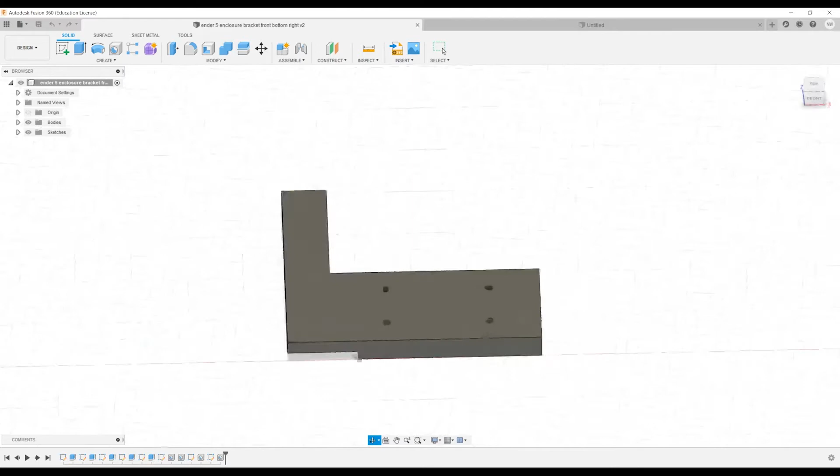So this is the completed model that I just made the other day, and again, based on our AutoCAD discussion and the design of this thing just now, this should make a little bit more sense. But basically, we've got this bracket where it's going to sit against the extrusion, and we're going to put 4 bolts in there. Now, if you're wondering about what's going on under here, the reason it's like this is if we go back to the Ender 5 and look, we've actually got some stuff going on here.

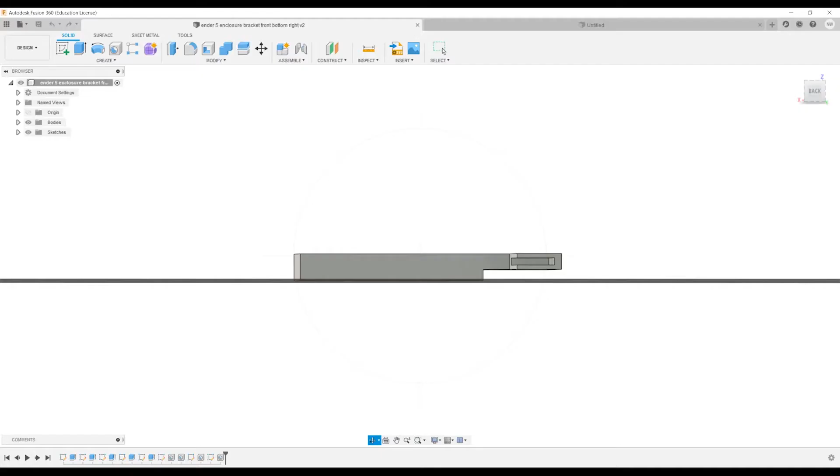So what I did was I measured it. It's between 3 and 5 millimeters. It was hard to get a good measurement of where this control panel stops from the extrusion. So I ended up going with a 5 millimeter gap down here so that this back piece is going to lay flat against the frame of the printer, and then this is going to go over anything that protrudes out from the bottom of the printer. So it's 5 millimeters, not very big at all.

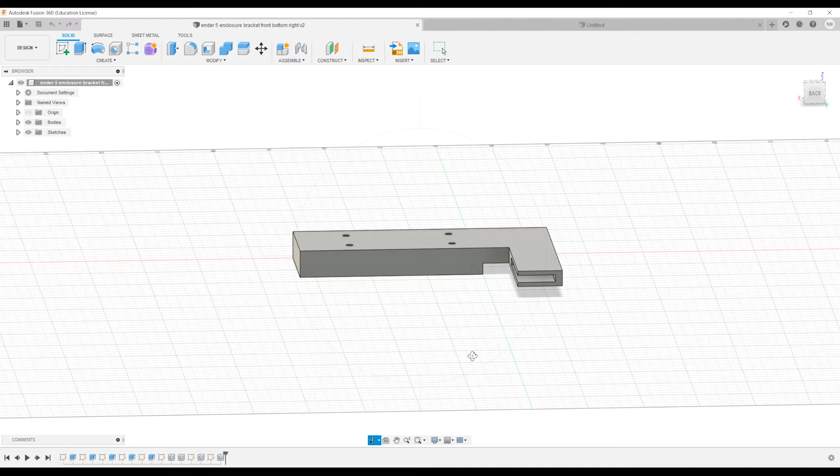And it is going to move the plexiglass sheet out 5 millimeters from the front of the printer, so it's not going to be 100% flush with the frame, but that's okay. The thing still needs airflow, so being able to pull air in around that small 5 millimeter gap is probably going to be good. So that is the piece.

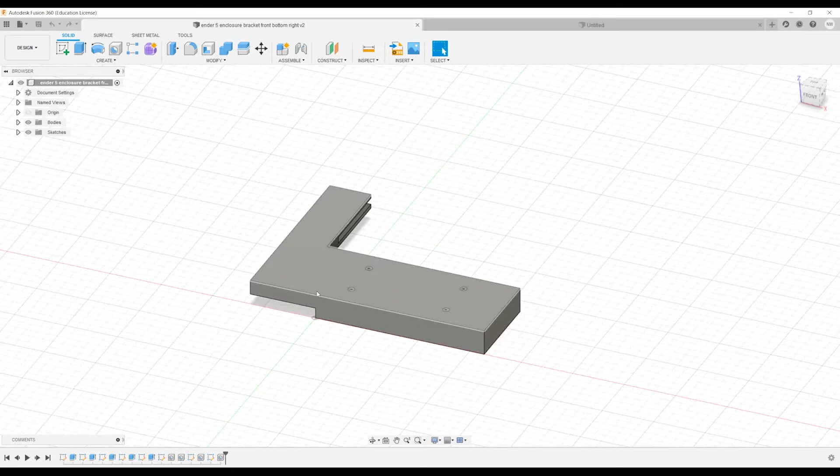We will go ahead and step by step recreate it over here in the blank Fusion 360 project that I've created. Now I'm going to pretty frequently make references back over to this for exact measurements, just because I had all this written down on a sheet of paper, and I made small changes to it as I went along and didn't record those changes on the paper. So I'm not going to be able to make this thing again right from scratch, but I'll make a couple of references over to here if I need to.

So the things that we know about our printer are based on measurements that I took, and if you're going to do the same thing, you should take your own measurements, even if you have the same printer. There's probably not going to be very many differences, but if there are, that would be not great.

So basically what we know about our printer is the frame, the extrusions, are 41 millimeters wide. I have just added them as 400 millimeters tall, which I'm not able to get a good 400 millimeters tall. But we don't really care about that a lot. We're going to be making 4 or 5 or 6 independent brackets that can slide up and down these rails any way that you want them to. So we don't really care about how tall this thing is. Really what we care about is the width, because the bracket's going to go the full width.

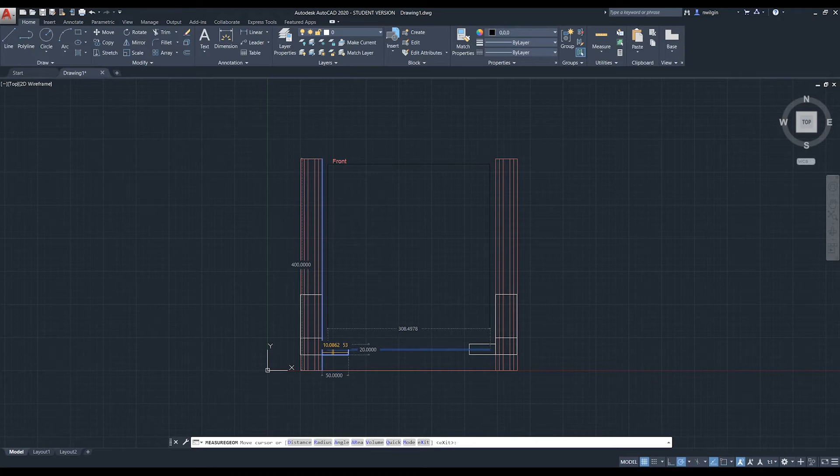We care about where the rails are, where our little bolt holes are in these rails that we can stick our T-nuts, and we care about how far out these flanges are going to come, what the little, what would you call that? Slit's maybe not the greatest word, but this little kind of drop-in area in here for the acrylic. So again, we don't really care about the height of these rails. We don't care really about a ton of the construction of the printer other than the width of the rail. So we're looking at 41 millimeters.

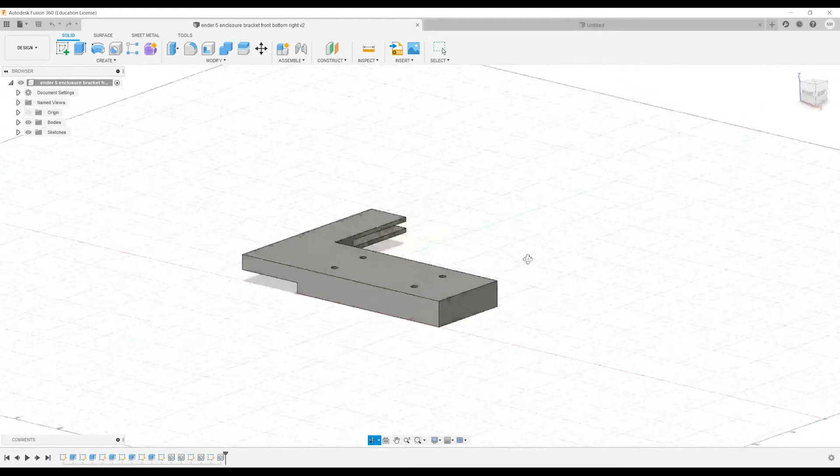So if we go back to Fusion 360, this guy, if we inspect, this guy right here should be 31.75 millimeters, which is 1.25 inches.

Oh, my headset just gave me a battery low notification, so we'll see how long this lasts.

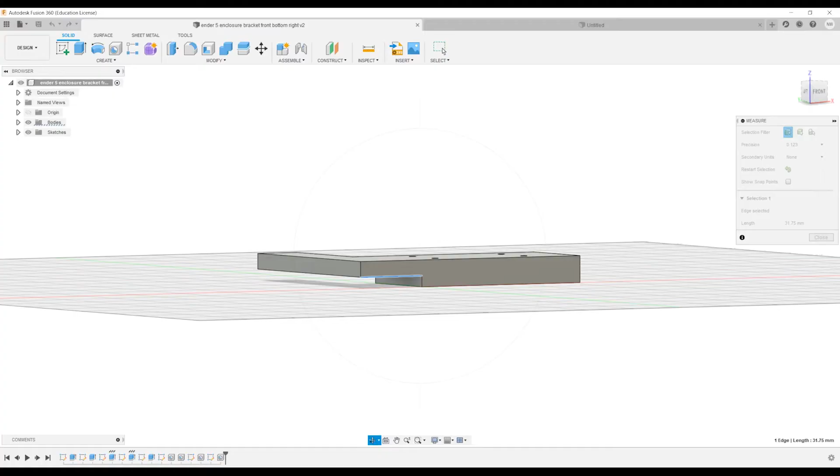But basically, this part where it kind of comes up, this is going to sit flat against the control panel of the printer right here at the top, and then it's going to drop down 1.25 inches with this, and it's going to come out. So those are our measurements. So we know it's 41 millimeters wide. We want to probably do, I think, 82 millimeters tall. Yeah, so I did 82 millimeters for our main bracket here.

So to start out with Fusion 360, and here comes the disclaimer. I'm a computer science engineer. I'm a programmer as a career. I am not a mechanical engineer. I am not a professional CAD user by any means. In college, I hung out with a lot of mechanical engineers. I did pick up a little bit of CAD experience, and obviously, if you have the software and enough time, anybody really is able to learn the ins and outs of a piece of software like this. So if you are watching this video and I say something that is not entirely accurate, or a process that I'm doing is not really airtight engineering-wise, leave a comment if you want. Please don't be hurtful, because I truly am confessing to you now I am not a professional with CAD.

The things that I make are designed really for my 3D printer. They're designed for, if I've got a buddy or a hookup with a CNC or anything like that, the things that I design are going to be designed to be used by me, and used by the things that I use to make these pieces. So they work. All of the things that I've ever made here have worked with my printer, the processes that I use and the things that I build. But again, if it's not airtight engineering, I apologize. We're always learning, and I hope to get better at this kind of stuff in the future as time goes on. So anyway, Fusion 360, we'll start out with a blank canvas here.

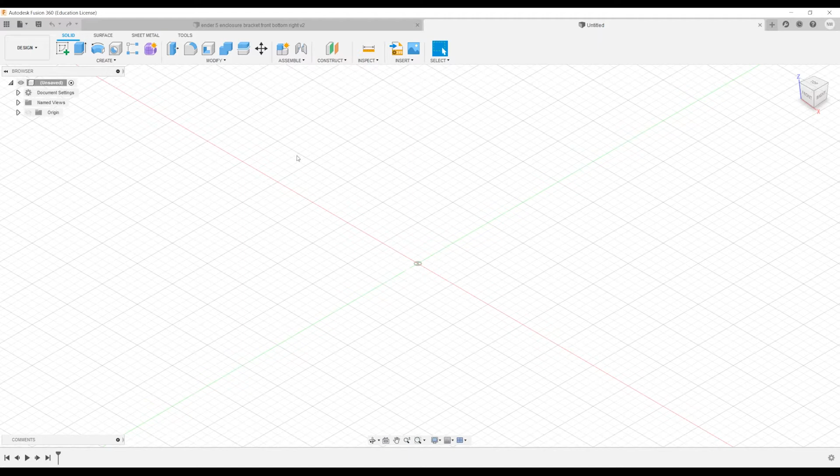And basically the way that I always do things is I sketch it out, and then I proceed to make it solid. So we'll start with a sketch, a two-dimensional sketch. Select really any plane. I usually just select the flat plane that's already there. And we said something along the lines of 82 millimeters long for our piece, and we know it's going to be 41 millimeters wide.

So we're just going to start our rectangle, and without holding down your mouse button at all, it's going to let you drag this. And you'll see these numbers here. There's a number on the left, there's a number on the bottom. Those are going to be your dimensions of the rectangle.

And here is where any kind of CAD software really is extremely helpful, because you could do 3D modeling of sorts in most programs, maybe even Photoshop if you wanted. But this is going to give you really exact measurements and ensure that everything is spot on. So in order to give the exact measurements that we want and not have to drag this to our exact numbers, you'll see how the one on the left is already highlighted. So that's going to give us an input to type in.

So we're just going to type 41 because our units are in millimeters. We know that the extrusion is 41 millimeters wide. So we're going to type 41. We're not going to hit enter. We're not going to hit escape. We're not going to do anything like that because we're not done. We're going to hit tab to tab over to our next input for the length of our sketch. And we said that was going to be 82 millimeters.

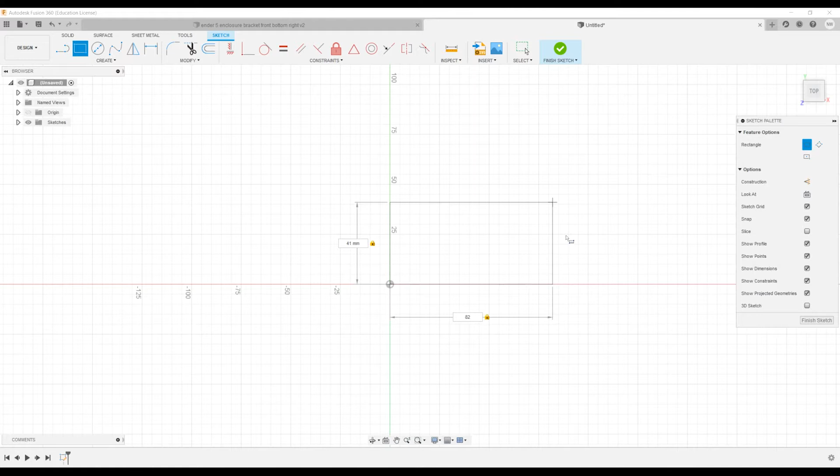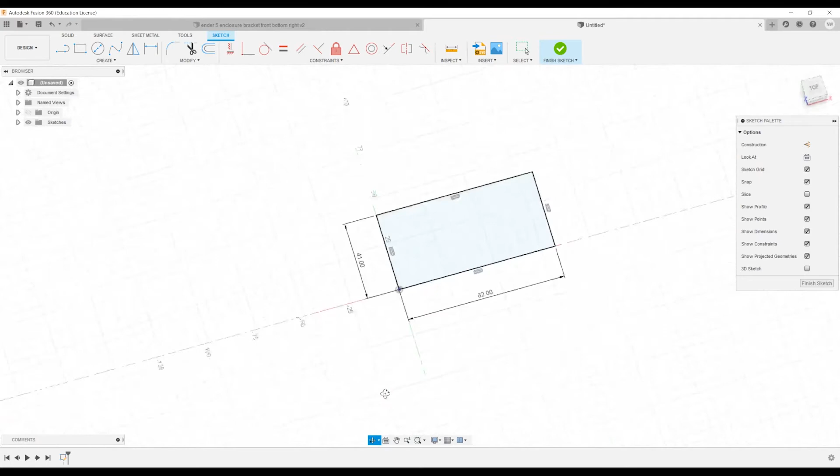So now that you've got 41 in width and 82 length, you're going to hit enter, and that's going to give you a 41 millimeter wide sketch with 82 millimeters long. So the next thing that we need to do is give this thing some depth, make it 3D. If we look at it right now, there's nothing really 3D about this. It's a 2D plane. So the best way to do this, at least in my experience, is to use the push-pull tool or extrude tool, like so.

Now, the question is, how thick do we want this bracket to be? I can't actually remember exactly what thickness I used for it, so we'll look here. We used 12 millimeters. Now, I actually do remember this now, I started out with 10 millimeters and was concerned about how thick some of these walls would be once you get down to this flange. So I decided to increase it from 10 millimeters to 12 millimeters.

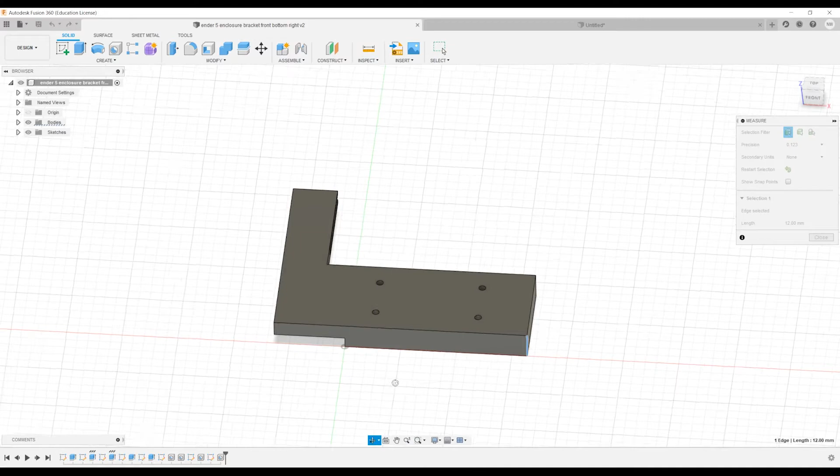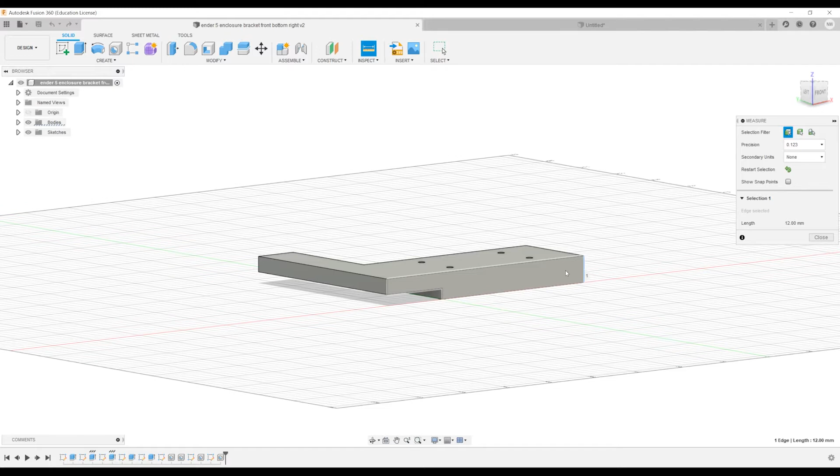And the reason is, remember how I said we need to drop this up for the control panel, 5 millimeters. Once we drop this, we're working with the thickness in millimeters minus 5 millimeters. So back when I had this piece as a 10 millimeter thick piece, we were losing 5 millimeters with the drop up, and that was making this total thickness 5 millimeters, which if we move around here and look, once you take away the 1/8 of an inch filling in here, these walls were going to be way too small. They were going to be just under 1 millimeter.

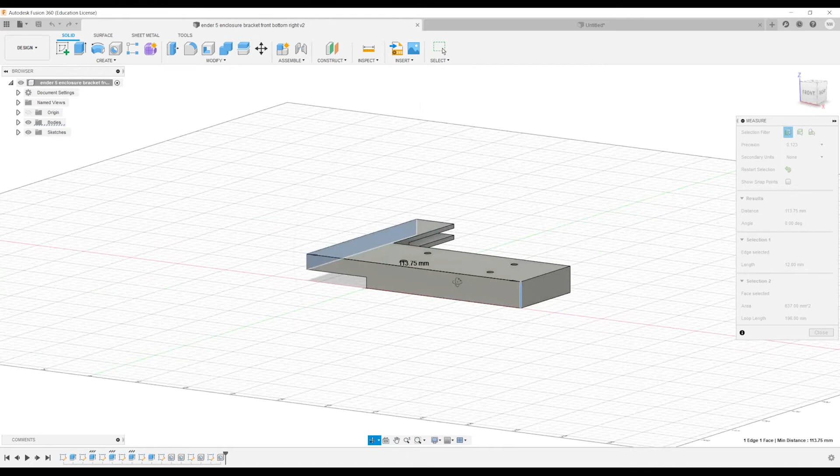And I thought that, one, I don't think the 3D printer's resolution is going to print that very well. And two, even if it did, I have a feeling that over time these things would probably crack. So I ended up adding 2 millimeters to the total thickness of this bracket. And that ended up bringing these walls to just under 2 millimeters instead of just under 1 millimeter. It's like 1.91, I think, and that should hold up a lot better. So that is the reason that we did that as 12.

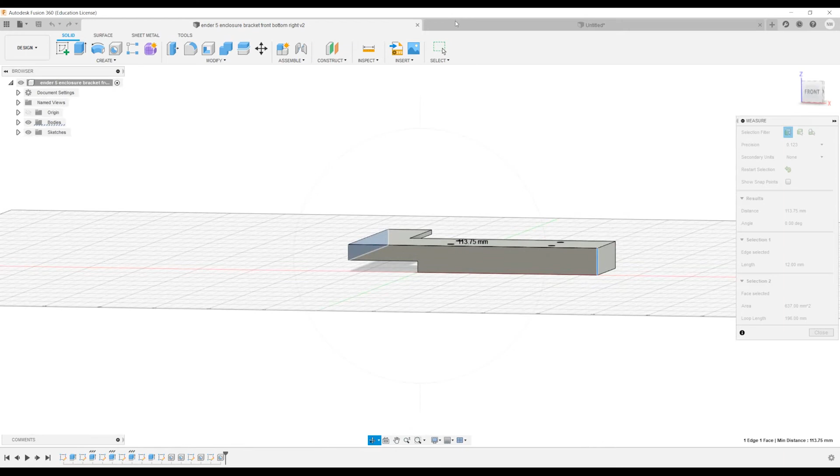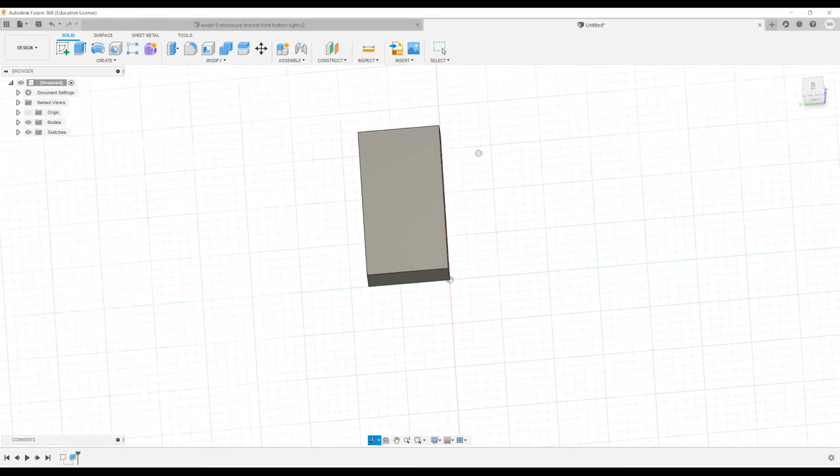So basically we're going to bounce back over to our new project, back over to the solid tab, hit extrude. Now we're going to pull this up 12 millimeters. We're just going to type in 12, hit enter, and bam, there we go. Now we've got a nice rectangular solid block. It's going to be 41 millimeters wide, 82 millimeters long, and 12 millimeters thick.

So now that we've got that, this block is going to essentially be this first white block on the top of our bracket. So this is going to be the piece where the bottom part meets the control panel. So we have a couple options here. We could continue making the rest of the bracket, or we could drill holes. I'm going to go ahead and continue making the rest of the bracket before we drill the holes.

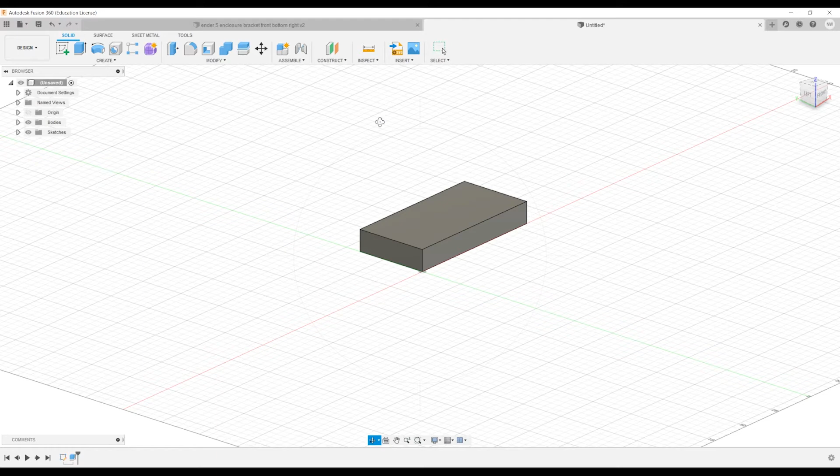So again, we're going to make the bracket for the right side of the printer. So we're just going to need to have our flange come off the left side of this bracket, so it's in the center of the printer. So the next thing we're going to do is we're going to create another sketch.

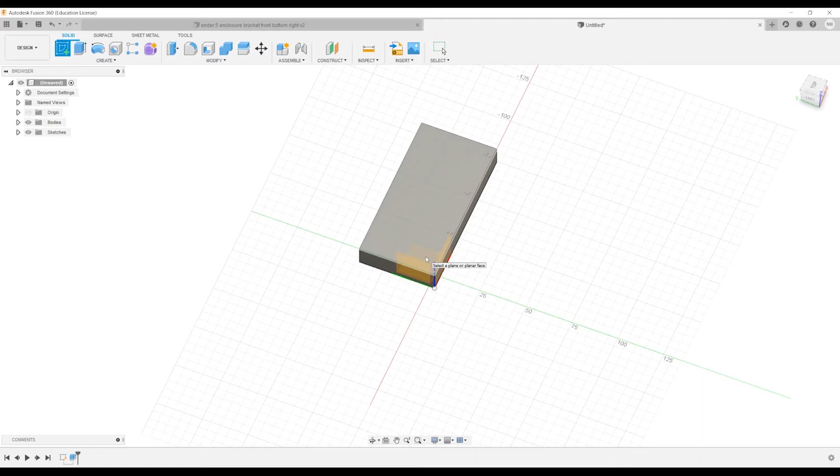Always create more sketches. Now, you know how I mentioned the lack of airtight engineering and lack of actual Fusion 360 training? This is probably where it's going to show itself. So I'm going to go ahead and select just the piece that we already are working on. We're going to draw another rectangle, of course. And what did I say? We're going to drop that down 1 1/4 inches, which is 31.75 millimeters.

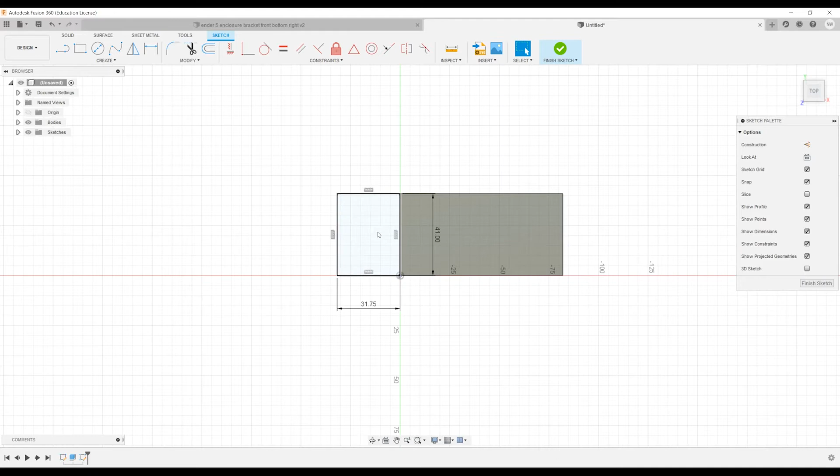So in order to do that, we're going to make it 41 millimeters wide like the existing piece, and we're going to make it 31.75 millimeters long. It's going to give us our drop down. Now we need to extrude this 7 millimeters. 12 minus 7 is 5. So we're going to grab this guy.

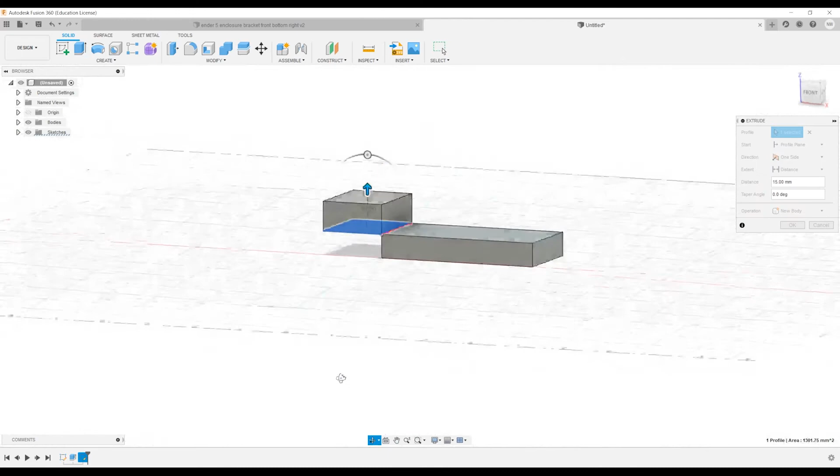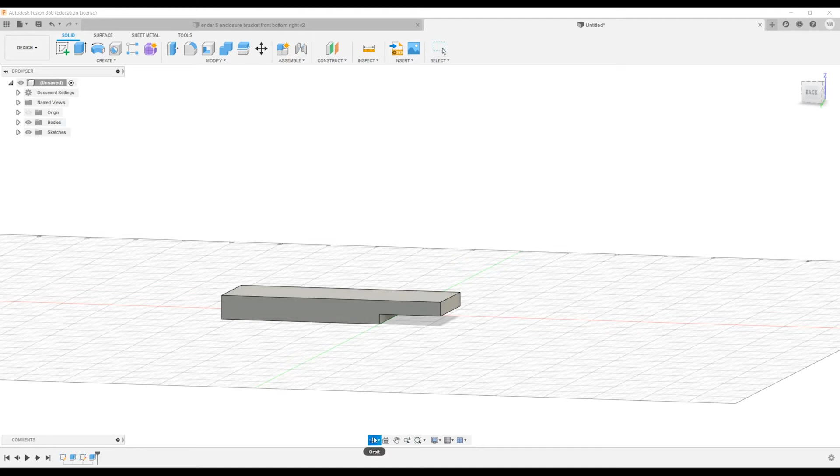Now, you'll notice that if I choose to extrude by a positive number of millimeters, we're actually not doing at all what we're supposed to be doing. The reason for that is because of the plane that I have selected to create the sketch on. So for this specific application, we need to go down by 7 millimeters. So we're going to type in -7, hit enter, and that's going to give us this offshoot from the main piece. So if we go up to inspect, click on this line here, it should say 5 millimeters. Perfect.

All right. Now we need to add the flange to the piece. So we've added our drop down here, or drop up here. Now we just need to add a flange that comes off this side. So we'll bump back over here just for reference and see what dimensions I used on this piece. 20 millimeters, and the inner portion here is 16.825. So we made this 20 millimeters. I can't remember exactly why, maybe it was just a nice round number. So basically we want a 20 millimeter flange that's going to jut off this drop up here.

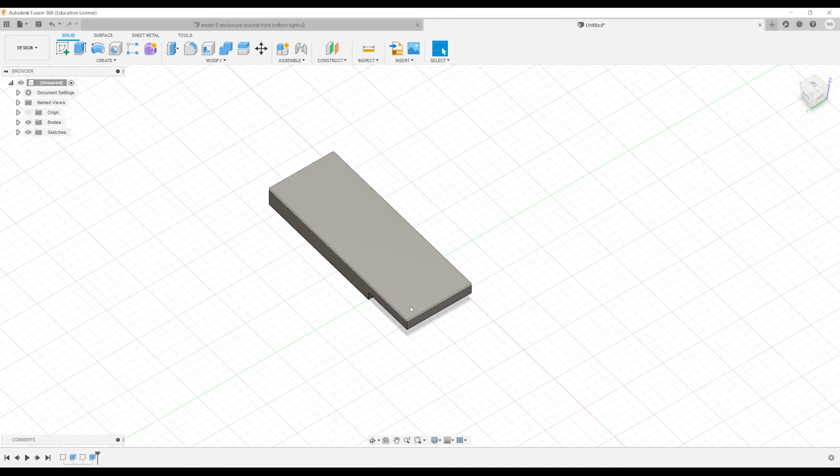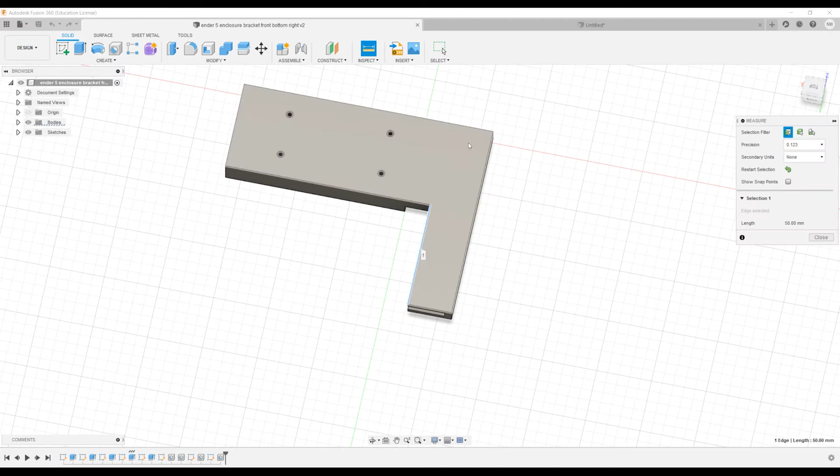So good old sketch tool once again, select the same plane. We're going to be coming off this side right here. So basically take your rectangle, start at the corner, and we made it 20 millimeters by, how many millimeters did we come out? 50. We came out 50 millimeters, so let's do that. 50 long by 20 wide.

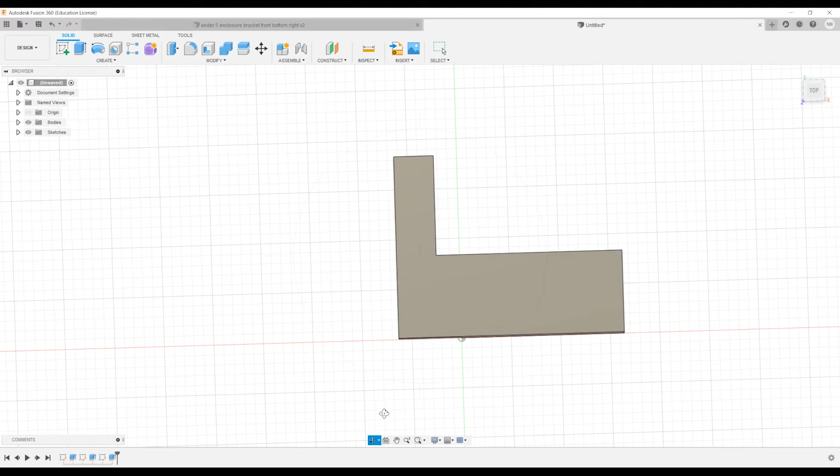There we go. Now, good old extrude, click that. Go ahead and type -7, hit enter, grab your rotate tool, and look at that. Wow, look at our bracket. Nice, nice, nice. All right, so let's go ahead and push this in so that we can get our piece of acrylic in there, and then we'll go ahead and drill the holes.

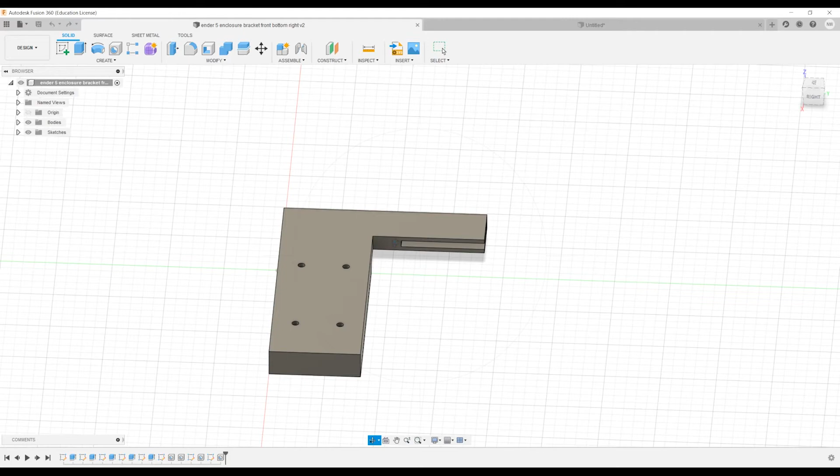So as you can see, the way that this is set up is so that the acrylic can slide in here. It's a ½ inch out from the extrusion. So this little wall right here is going to be a ½ inch. And then right in here, you see it's going to slip in, and then it's able to come all the way out. So this part's open right here.

So the acrylic we know is 1/8 inch thick. So if we take our inspect tool and look, what is that in millimeters? I already did this once. So 3.175 millimeters. Let me just double check that. 3.175. Yep, looks accurate to me. Let's triple check it. Yep, that is accurate. So 3.175 millimeters is going to be 1/8 inch. So that's the goal that we're going for here.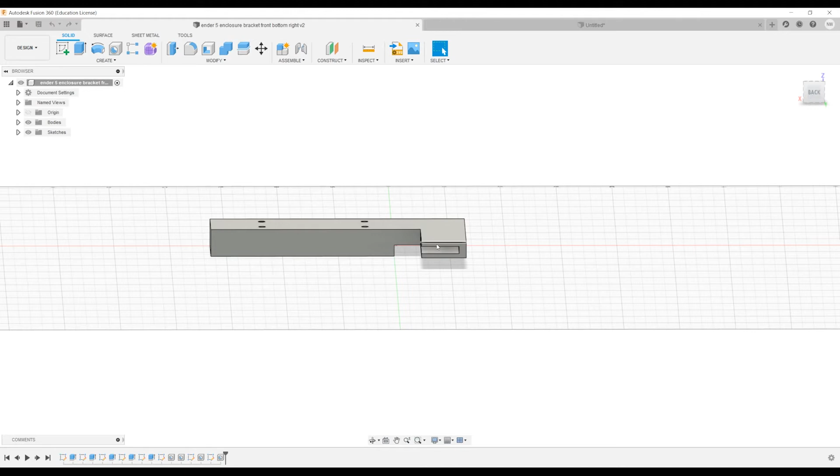And then I believe that our walls are going to be 1.913 millimeters. So getting this centered, one more measurement we've got to do is this guy right here. What is a ½ inch to millimeters? 12.7. So let's verify that this is 12.7. If we just do an inspect, 50 millimeters, 37.3 millimeters. Yep, that is going to be 12.7.

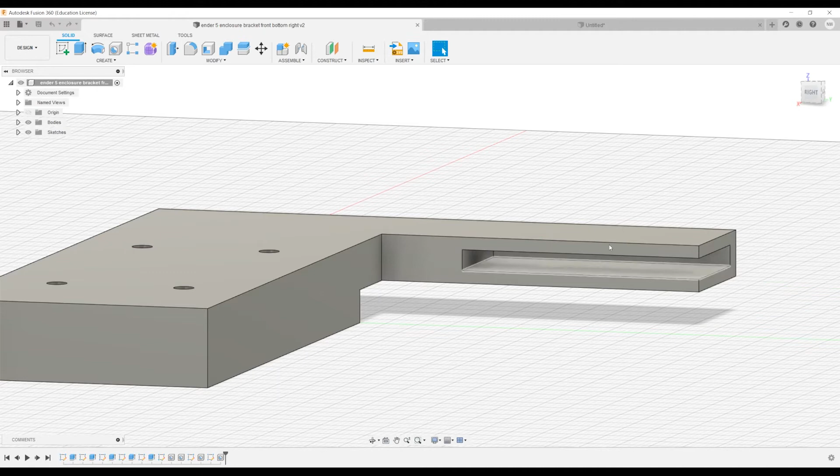Perfect. So in order to do that, sketches are my best friend. They might be your best friend, who really knows. I'm going to make a new sketch on this face here. I'm just going to take a line and do right out here 12.7 millimeters. All right. Oops. Yeah, another line.

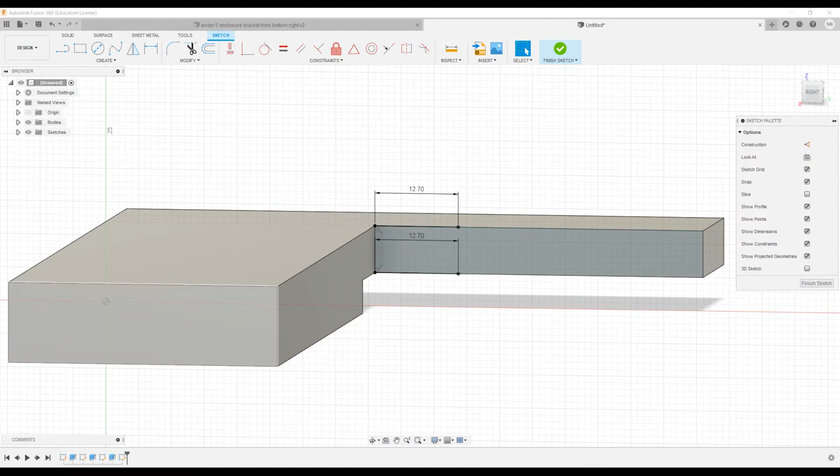12.7. Okay. Now we know that 1/8 inch was, what did I say that was? 3.175 millimeters. So if we know that 1/8 inch is 3.175 millimeters, we know that the thickness of this face is 7 millimeters. So if we take our calculator again, and we do 7 millimeters minus 3.175 millimeters, we're left with 3.825. And since we're putting this indent kind of deal in the center of the piece, we need to divide this by 2 to figure out what each wall height is going to be,

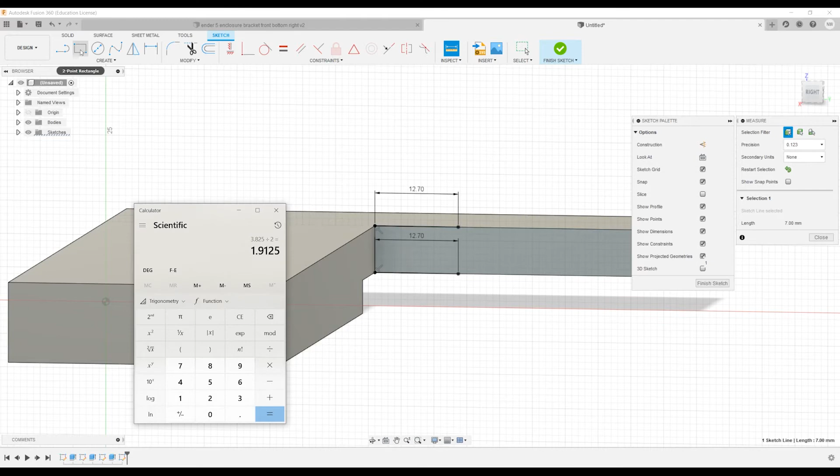and that's going to give us 1.9125. So in order to determine where the walls stop at, I'm going to take a line and do 1.9125, okay? And then another line from the bottom here, 1.9125, okay? So now we can basically just take our rectangle tool. We're going to start at either of these points that we just created with the line, okay? Drag up and then drag out.

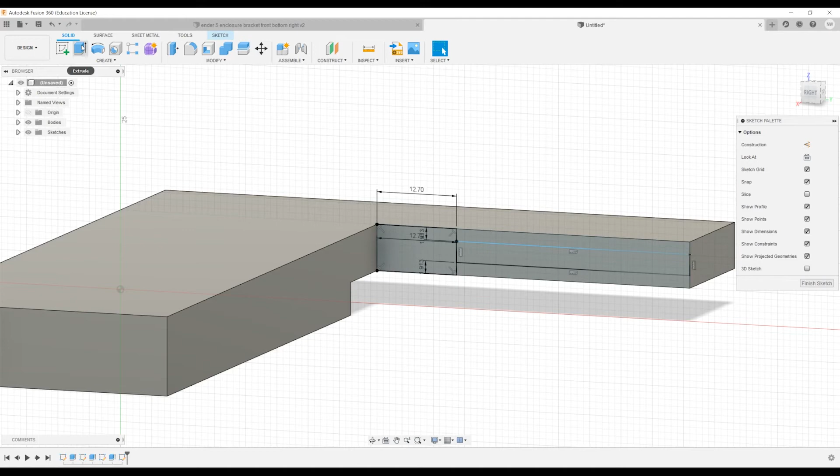And then you'll see that on the left, our one measurement on one side is 3.175 millimeters. Our measurement on the other side is 37.3. So we're going to go ahead and create the sketch. All right. Now we're going to come back to the extrude. We're going to click on this face, and then if we extrude it inward like so, you'll see that we're creating that indent. So we want to figure out how deep this needs to go, and then how much of a wall we kind of want on the bottom.

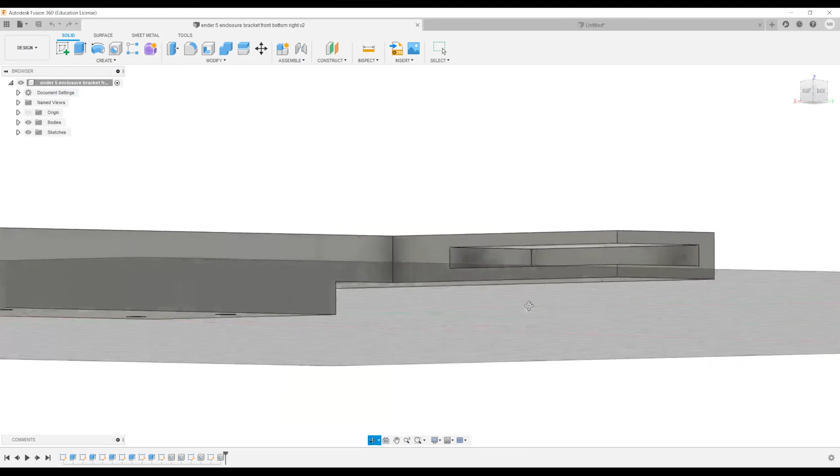So let's see what I had done over here. Like I said, a lot of these numbers were just kind of on a whim. So okay, inspect, 20 millimeters minus 16.825 gave us 3.175. Yep, okay, that makes sense. So we're putting 1/8 inch wall down here. So let's, oops, Control Z, I backed out of that.

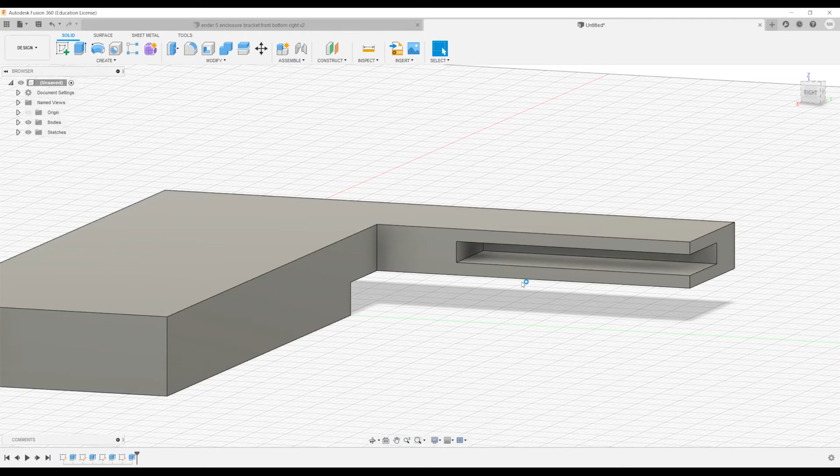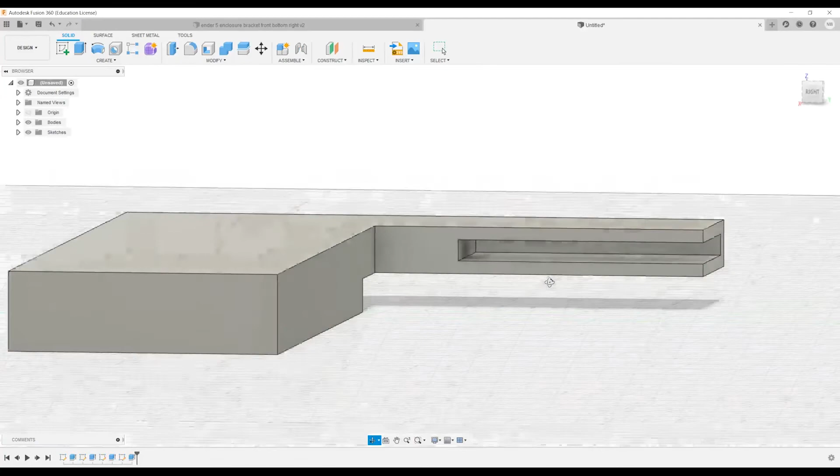All right, we're going to go ahead and extrude that. And we know, what did I say this was, 20 millimeters? So basically, we want to go in 16.825, right? So negative 16.825. Enter. All right, now we've got our little slot. That's a better word for it, slot. There we go. All right, so we've got our little slot for the acrylic sheet to slide into.

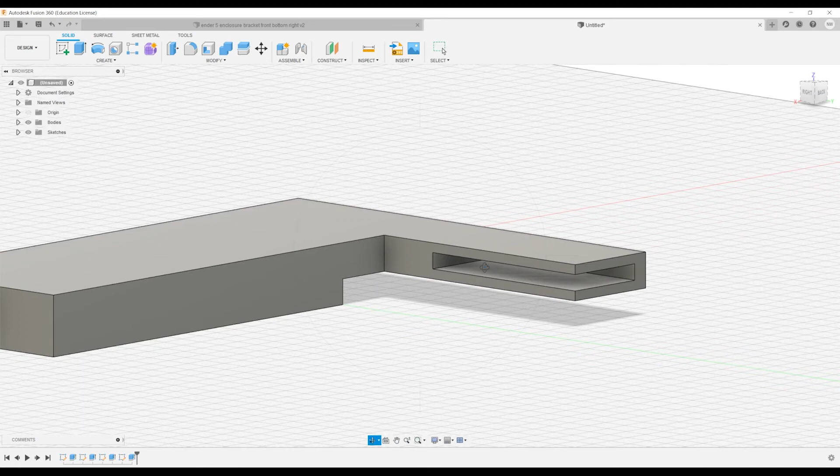So, basically, what you've probably gathered from me so far is that I really like making sketches. The sketches really help me kind of get things positioned just perfectly. There very well may have been a better way to position this slot in the center of this flange here, but that is the way that I did it with the sketches.

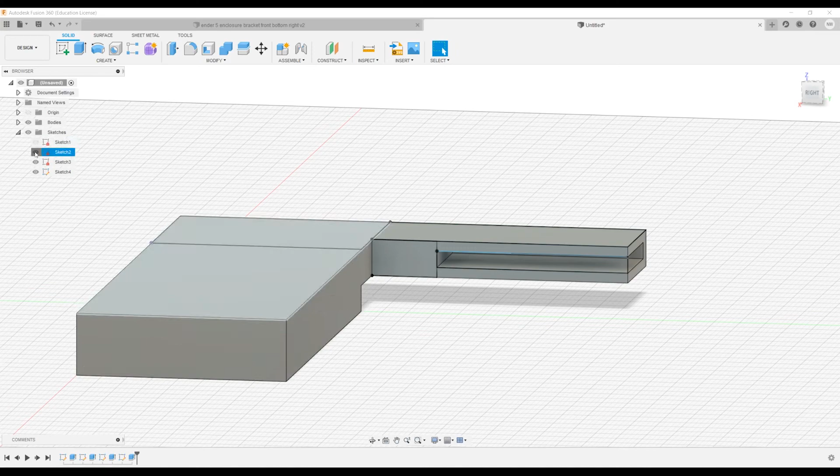If you are wondering where your sketches went, or if you kind of do a solid operation like this, and then all of a sudden they disappear, this took me probably a week to figure out, but they're actually all right in this folder here. So if you look, they're actually all hidden. So if you want your sketches back, you just kind of unhide them, and you'll see where they're all at. So this is going to become useful here in a second, and I'll show you why.

So the next and final thing that we need to do here, and hopefully my headset doesn't die. It gave me a low battery warning probably 10 minutes ago.

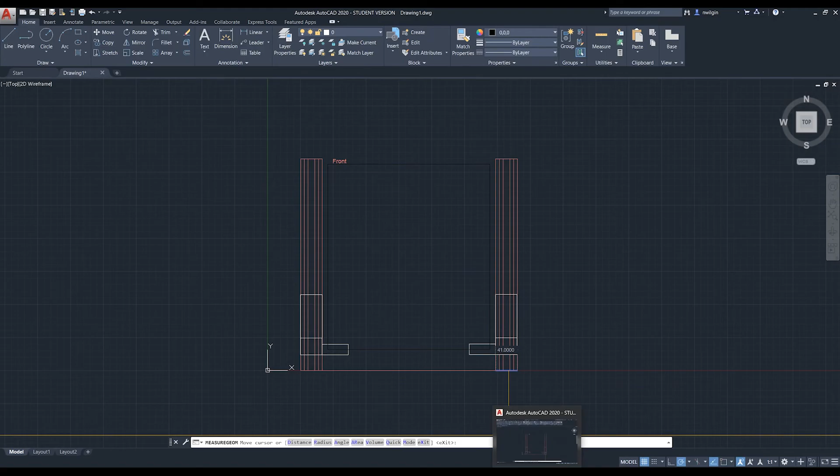But the last thing that we need to do here is create our holes. So really the most important thing is obviously that the holes are going to line up with our kind of slotted rail here, with the T-nuts in it. So the T-nuts that I use, I actually print plastic T-nuts, and the ones that I use are an M3 thread and diameter and all that. So I use M3 screws with them. M3 screws are, I think, 3 millimeters in diameter.

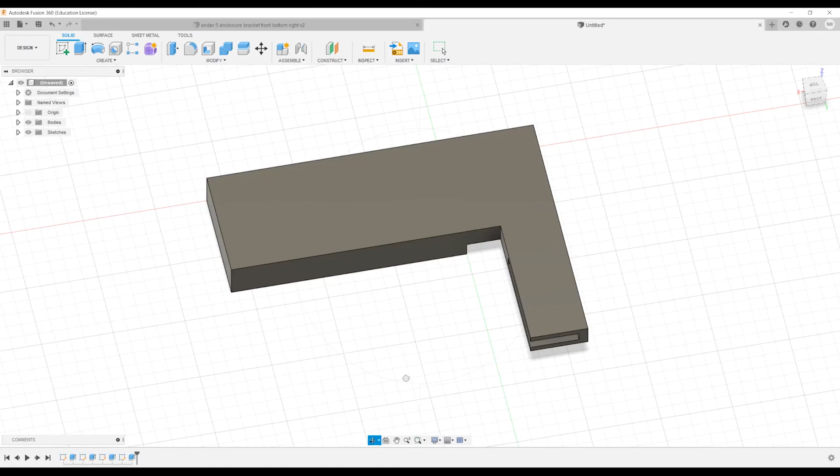So, where was I going with that? Sorry. So basically, we're going to be making 3 millimeter holes here, and the only thing that we need to make sure is that the screw is obviously going to drop right into the center of this rail. So we know that the rail is, what did I say, 7 millimeters? Yeah, we know that the rail is 7 millimeters wide. So we just need to find the center of 7 millimeters, which is 3.5 millimeters.

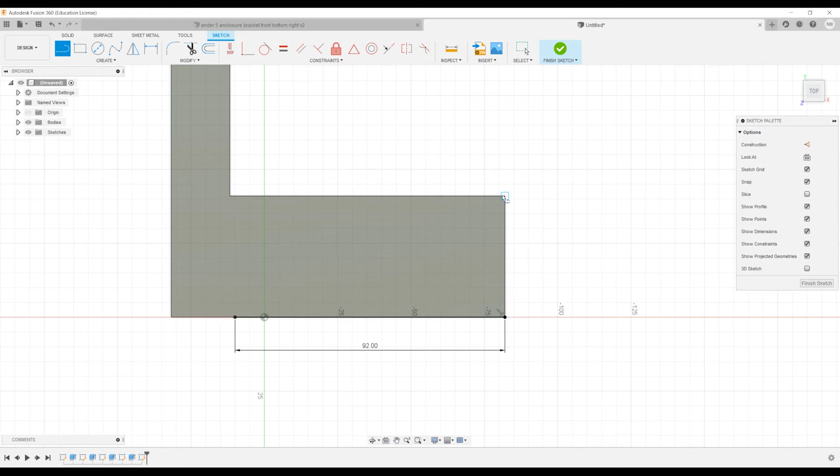So we'll start by making another sketch. We'll start by putting it on this face. This is going to be real easy. We're just going to go ahead and kind of sketch this up. So I'm going to go and just make a 92 millimeter long line here, and I'll show you why in a second. All right, we're going to go ahead and make a 92 millimeter long line here. And then we should be able to do 46, which is half of 92, so we'll do 46.

46. So basically what I've done is just divided this up into two sections first. So all that we really know is that there's going to be 2 holes in this section, and there's going to be 2 holes in this section. In fact, I should probably just seal this off to show you that it's going to be this section and this section. So now we know that in this first section there's going to be a hole somewhere over here and a hole somewhere over here.

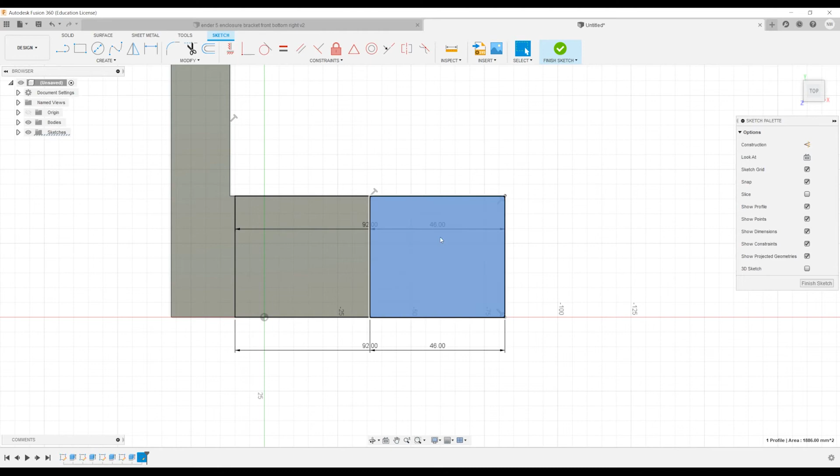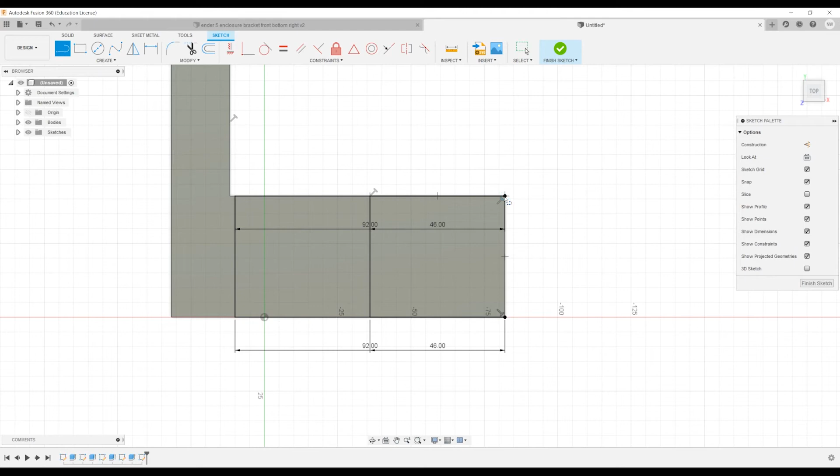So in order to do that, we'll select our line tool again. This edge is going to be one edge of the frame of the printer. This edge is going to be the other edge of the frame of the printer. So we're going to come in 7 millimeters, and after that 7 millimeters is where our inner rail, our rail to bolt to, is at, and we know that's 7 millimeters. So we'll start out, bring this in 7, and then just bring that down 46.

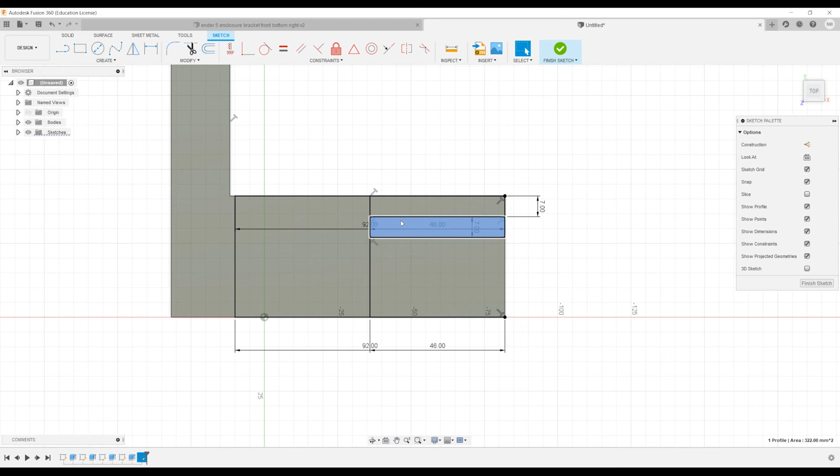So now we've got one section made out here. We're going to go 7 more millimeters, and then we're going to bring this section down again. Okay, so now we know that one hole is going to go right in here. Where in here? Well, let's take half of 46. That's 23. Oops, let me undo that real quick. Let me put the line right here. So we're at 23 millimeters. And then from the 23 in, we're going to go 3.5. So on this dot is where we place our first hole.

So we're going to do the same thing over here. We're going to come in 7 millimeters. We're going to come down all the way. Then we're going to go out 7 again to make our inner rail portion. Come down. So this is going to be our inner rail right here. So then we're going to come in 23, and then we're going to come out 3.5. So we're going to put a hole here and a hole here.

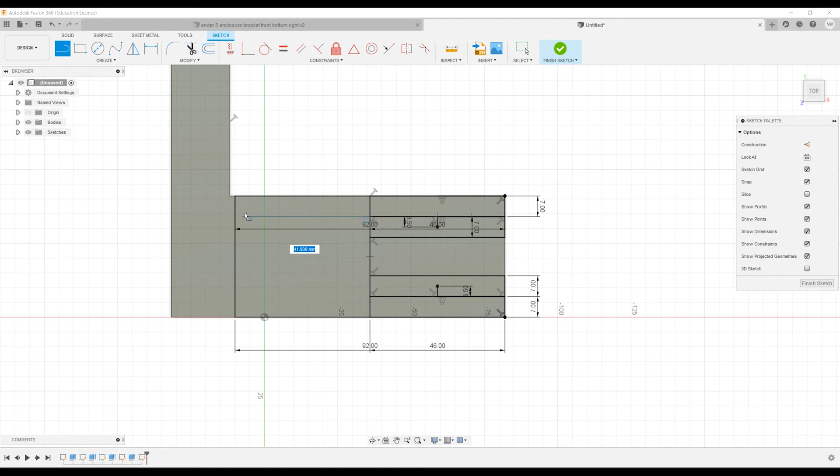Great. So let's do the exact same thing down here on the bottom. And we can conveniently use some of these lines that we already have with snapping to points. So we're going to just draw this line down. Just draw this line down. And then do the same thing over here. Beautiful. So come in, half that to 23. Perfect. 3.5. Right in here, 23. 3.5. Perfect. All right, so we've got our locations for 4 holes.

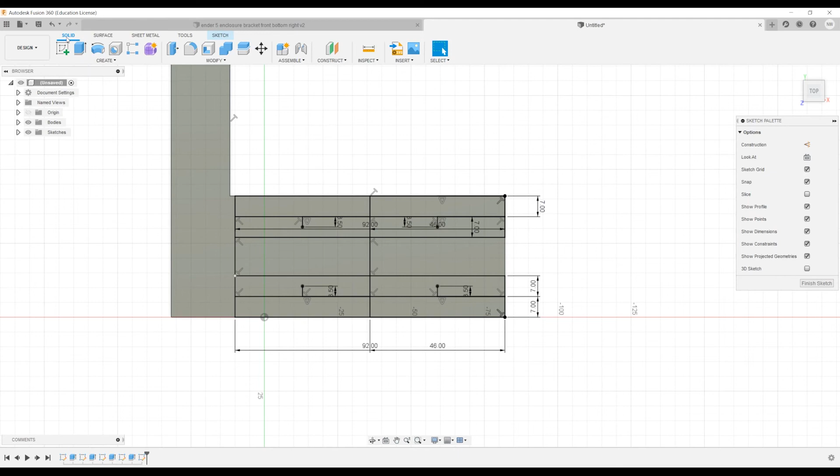1, 2, 3, 4. They are going to line up perfectly with the inner rail portion. You're going to be able to just throw a screw right through there, screw it into the T-nut, and you're good to go. So now, how do we make the holes? Extremely simple. Bump over to the solid tab again and click on the hole tool. Now here's the important part. Rotate your face so that you can see all of your little points perfectly.

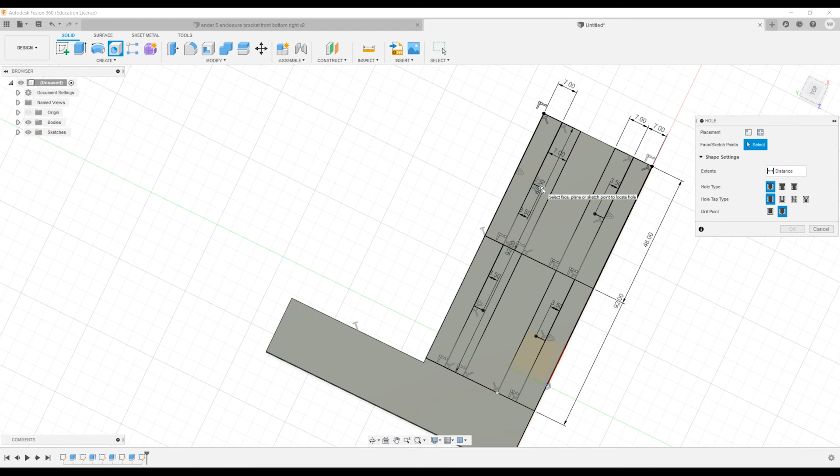Hover over a point, very carefully, get your cursor right into the center there. When you're ready to place the hole, simply click. It's going to put a giant hole, and we're going to edit that. So remember how I said M3 screws were 3 millimeters in diameter? So we're going to hit 3 for our hole diameter. This hole context menu over here will show you each measurement. So right here, the opening of the hole is going to be 3 millimeters.

The height doesn't really matter. It just needs to be taller than or as tall as the thickness of our piece, which we said was 12 millimeters. So we're just going to leave that as 30. Not really going to hurt anything.

Then we're going to change the drill point, because obviously this says angle, which doesn't really matter, but just for completeness or maybe at best engineering practice, we're going to choose flat. So it's just going to drill a flat hole straight through there, or not even drill. It's just going to print a hole straight through there. Click OK. Oh no! Now look, all of our sketches went away.

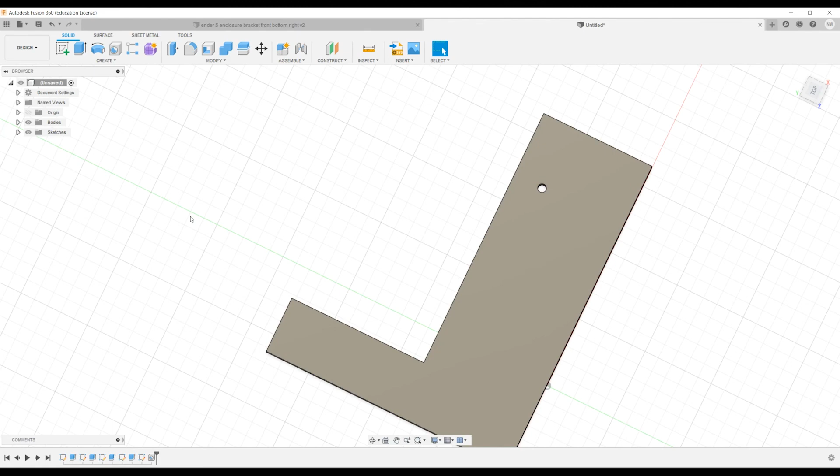Remember how I said the sketch view is going to come in handy later? The first time this ever happened to me, I freaked out because I spent a ton of time making a bunch of sketches, made the hole, and then it was just all gone. And I thought I had to just repeat the sketch process, which was really annoying. But you don't. All you have to do is come over here to your sketches and show them again.

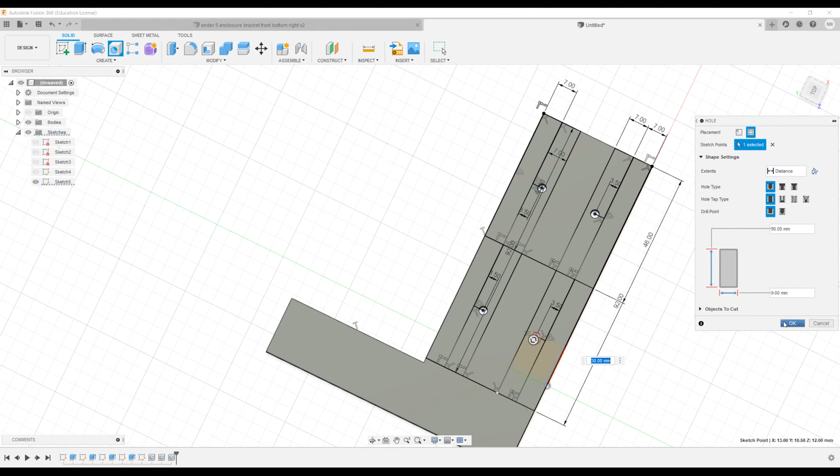So we're back, create another hole, and we're just going to do this exact same thing on this next point. Now that we've modified our hole settings, you're going to notice that they're the same. So we can just click OK without modifying anything else. Our sketch is not going to disappear this time. So the hole tool again on our third point, and click OK. And finally, the last point. And click OK. Now you can hide the sketch again to see your completed piece.

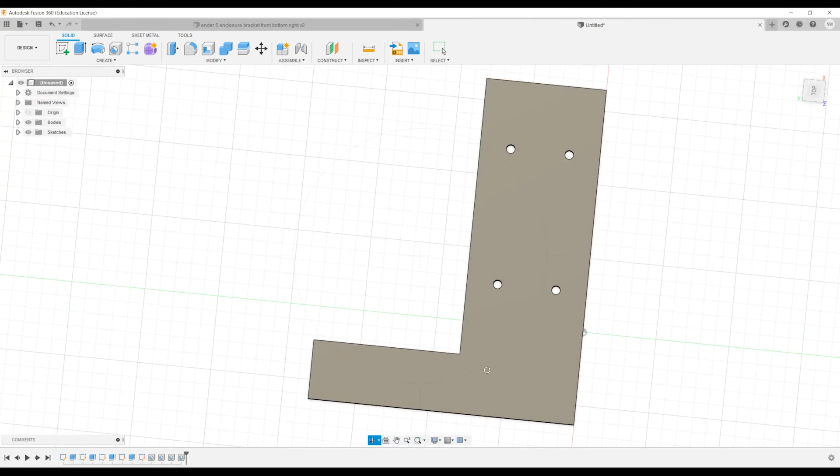And as you'll see, our holes go all the way through the piece. They are pretty well centered. I mean, they line up perfectly. And if our math has been done correctly and my manual hand measurements of the printer have been taken correctly, this should lay right on an aluminum extrusion, and M3 bolts should slip right through there to a T-nut, which resides in the extrusion.

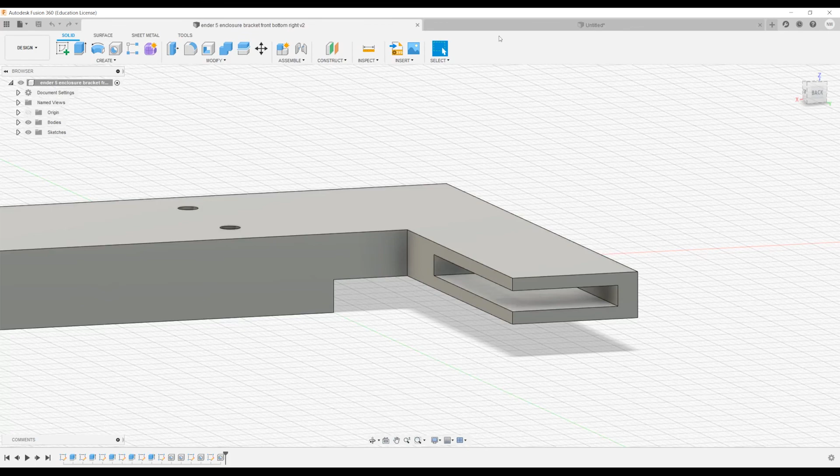So that is it. I'm actually kind of proud of this because I didn't know if I was going to be able to efficiently recreate this on camera. This is the first take and first video, so I think we did a pretty good job here, guys. So that is one bracket. Basically, we're going to do the exact same thing for the other side. We're just going to make the flange come off the right instead of the left. The exact same dimensions and everything.

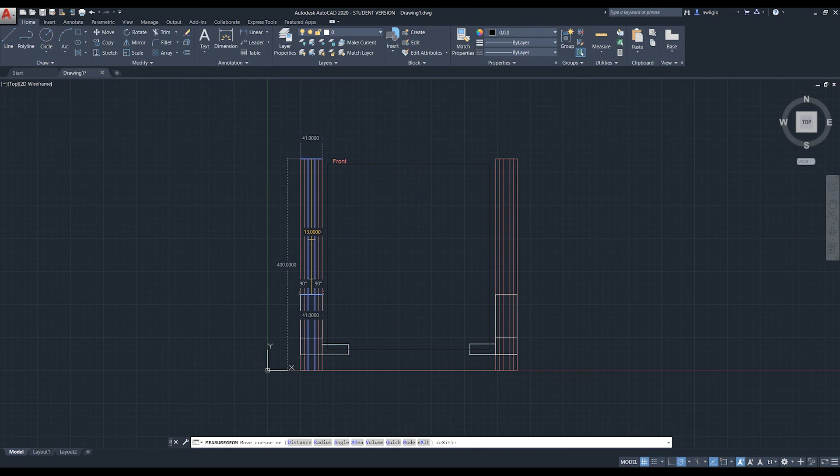The things that I haven't yet designed are the brackets that are going to hold or support the acrylic sheet as it goes up the printer frame. So probably going to have some new stuff for that eventually, which would be kind of cool to talk about, since this bracket's pretty much the same as this one. So yeah, that is it.

If you guys have an Ender 5, I'm not sure if the Ender 5 and the Ender 5 Pro are the same frame-wise, but I have the Ender 5 Pro. The frame is like this, like I had shown you. These brackets will in fact work with the Ender 5 Pro.